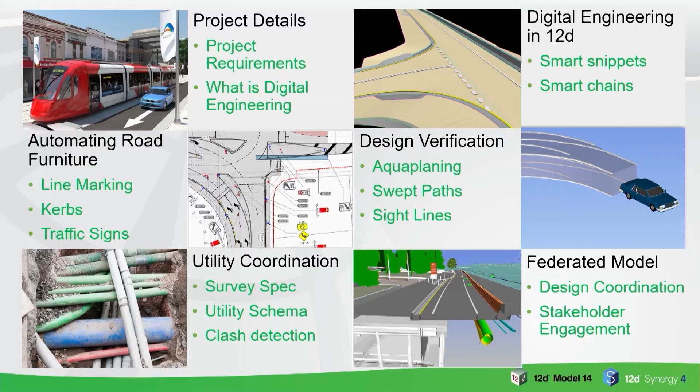He's a senior engineer from the highways team in Sydney. Today we're going to present the Parramatta Light Rail project, going over this rough content: project details, what is digital engineering, then I'll move you on to Jarred, who's going to talk about digital engineering in 12D using smart snippets and smart chains. Then automated road furniture using line marking, kerbs, and traffic signs. Then design verification: aquaplaning, swept paths, and sightlines. Then back to me, finishing with utility coordination using the survey specification, utility schema, clash detection, and finishing on federated models, design coordination, and stakeholder engagement.

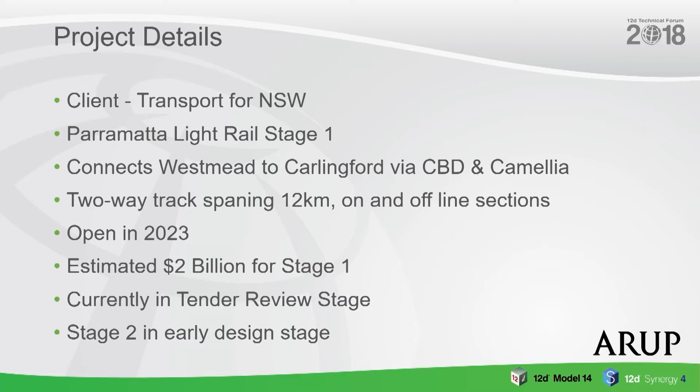First of all, the project details. The client for the project was Transport for New South Wales. The project is stage 1 of the Parramatta Light Rail, connecting Westmead to Carlingford via the Parramatta CBD and Camellia. It's a two-way track spanning roughly 12 kilometres, on and offline, through urban streets as well as offline sections. It's due to open in 2023 with an estimated cost of $2 billion for stage 1. The scheme is currently in the tender review period, so complete award in a few months' time. Stage 2 has been announced and is in the early design stages as well.

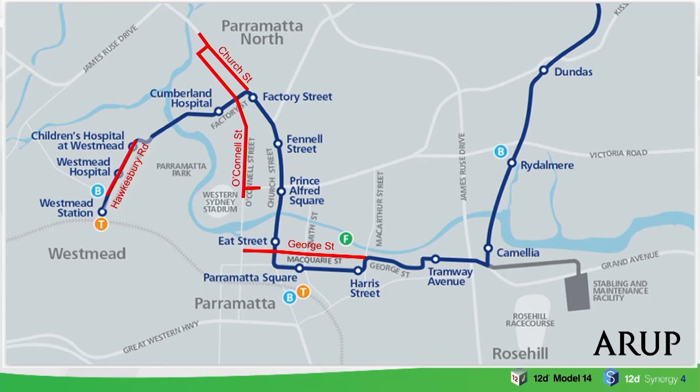In terms of the client and what they actually wanted from us, they wanted all 3 enabling works packages delivered in 16 weeks, a very, very quick turnaround. That was to enable them to get these off to a contractor to be constructed before the main works commenced. They also wanted to apply a high level of digital engineering on the project and develop a 3D model, applying work breakdown structure and naming to enable 4D, 5D and 6D BIM - that'll be asset management, I'll explain next slide - as well as use the model for design coordination and stakeholder engagement.

So what actually is digital engineering? It does seem to be a buzzword going around for the last few years, but I'll try and explain it, or what Transport defines it as. Digital engineering is simply a collaborative way of working using digital processes to enable a more productive method of planning, designing, constructing, operating, and maintaining our assets. This is achieved by creating a common data environment, a CDE, that aligns digital information systems, including CAD controls - time, cost, risk, etc. - asset data, and other related systems.

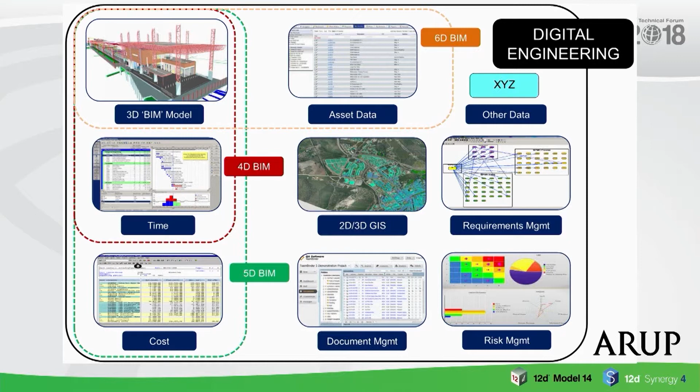This diagram shows where you have your 3D model, which then links to the 4D model, which would be like your Microsoft Project, then linking back to your cost, which would be like CostX, and then linking to your asset data at the very end of the project and handover. You also have other systems like 2D and 3D GIS, document management systems, risk management, requirements management, etc. So I'm now going to pass you on to Jarred, who's going to talk about digital engineering in 12D.

Thanks, Niall. As Niall's already discussed, one of the main constraints was the time frame that we actually had to deliver the project in. So I'm going to talk about a few of the design tools that the road design team used to, I guess, reduce the amount of rework or reduce the amount of documentation, and ideally get the design right first go.

One of the obvious things that we used was snippets, or smart snippets. So we had snippets for carriageways, barriers, kerbs, pavements, retaining walls, all those sorts of things.

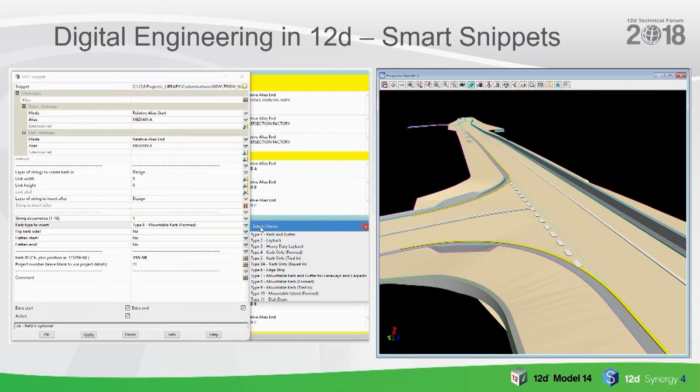The idea being is that we tried to limit the amount of manual inputs into the snippets that could result in errors. So the snippets had all the code hard-coded into the snippet, or it referenced project details or project attributes, and that way there was consistency across the project. The design models were consistent, obviously meant the output models were consistent, and there were obvious benefits from that.

In addition to the design elements, we also had other snippets that were doing things like the vertical clearance envelopes. You probably saw an example of that yesterday. We had our own version of it. We also had things like modelling the clear zones within 12D.

That obviously meant that we could design barriers on the fly. We didn't need to do any sort of review process afterwards. Other disciplines were also using those outputs. So the clear zone outputs went straight to the landscaping team, so they knew instantly where they could and couldn't plant different species of trees, or whether it had to be trees or shrubs or differences like that.

Also the snippets, in the background, were embedding attributes into all the trimeshes and things like that were being created. So when we sent IFC models out to other packages, like building structures or civil structures, they could interpret our design straight away. They didn't need to be asking us questions or anything like that. They knew exactly what they were looking at. Obviously it just sped up design time, sped up the coordination between disciplines.

Another obvious one is smart chains. So again, we had one source or one chain that would effectively run multiple times, taking advantage of the parameter files. This meant that we could obviously make tweaks to outputs easily and then get consistent outputs across disciplines or across packages, that sort of thing.

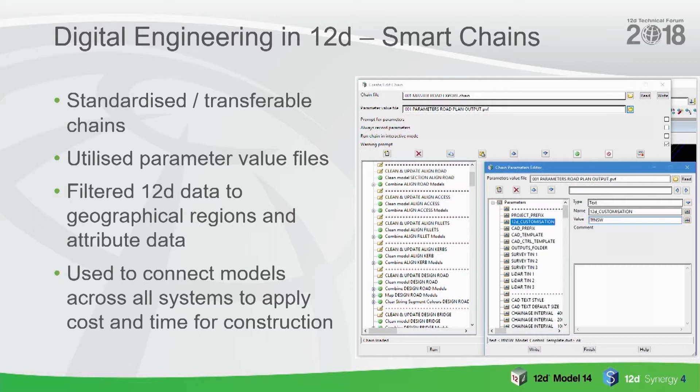One of the things we found is that we always spent a lot of time at the back end of projects doing the documentation, the sort of things that get shoved into the back of reports and don't really ever get looked at but need to be there. We wanted to do all that sort of stuff on the fly, so that we didn't have that period at the end of the project where we had to go back and do all the checks. So we had a whole bunch of macros that helped us with that sort of thing.

One of the main macros that we were using was this dynamic signage macro. The way that it worked was there was a spreadsheet database which was populated right at the start with a few manual inputs, basic things like a control line name, a chainage, an offset, a sign type, that sort of thing.

Within 12D, the macro read this spreadsheet and pre-populated the rest of the values, like sign sizes, pole heights, footing depths, all that sort of thing.

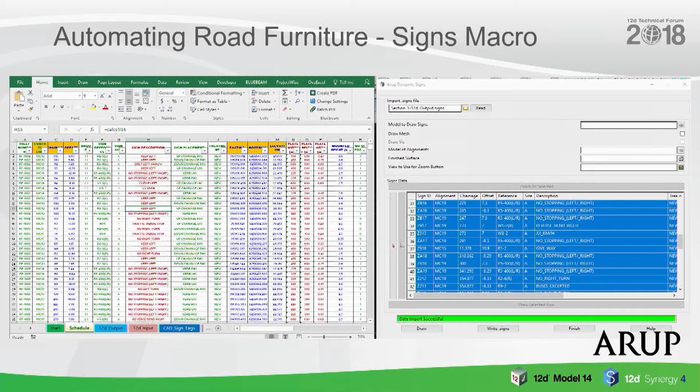The macro, once it read all that stuff in, it then went and created a whole bunch of stuff in 12D. It created the true size trimesh of the sign, so you knew the physical extents of it within 12D instantly. It created a 2D scalable block, 2D scalable labels, all that sort of thing. That went back out of 12D, and there was no manual CAD work needed to label the signs or present it. It was already done via the macro.

Obviously this sped up scheduling, sped up time, all that sort of stuff. The other benefit of the macro is it went two ways. So once you had that 3D true scale block within 12D, you could go and move it or update the register within 12D, and then 12D would overwrite the spreadsheet back again. So you could do both the design within 12D and outside of 12D. Very handy.

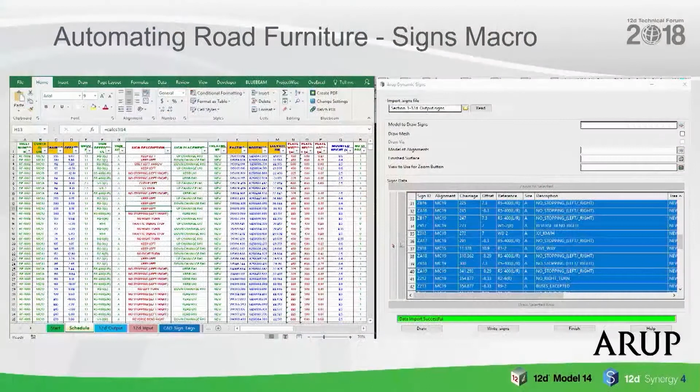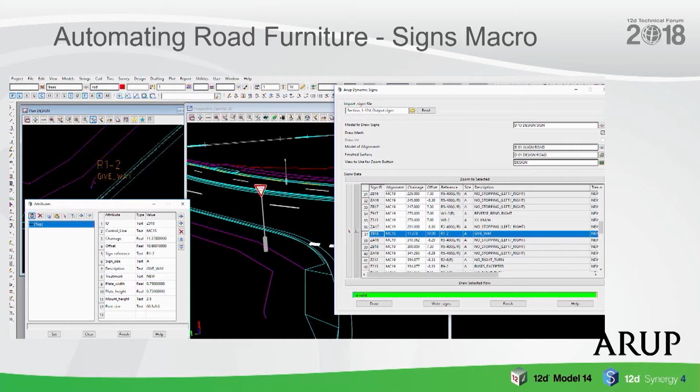Here's just a couple of different screenshots of it showing the spreadsheet there within 12D. The macro also created a whole bunch of attributes again, so if the trimeshes went back out of 12D, you could instantly see what the trimesh was about. Just another good visualization or screenshot there of how it all looked once it all came together.

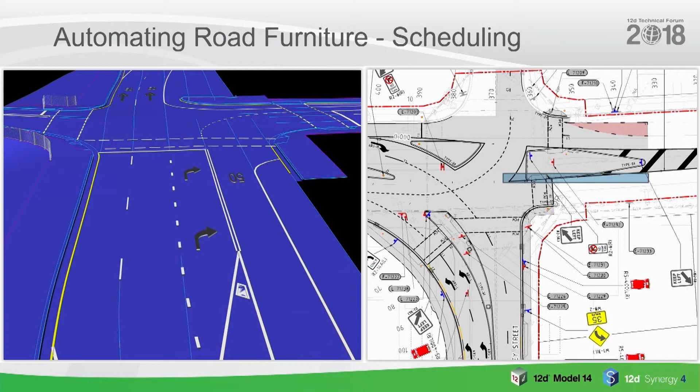Another thing our snippets were doing was trying to automate scheduling. We particularly used that for road furniture items, things like line marking, delineation, arrows, symbols, signage, curbs, barriers, all that sort of stuff. The snippets in the background applied all these attributes and data to what was being created, in addition to just the design strings or design links, so we could automate scheduling. If the design changed, schedules happened automatically, with no need for someone to sit down and add up all the lengths or quantify things themselves. We could easily add all the annotation within 12D.

Another thing, we're trying to speed up and do all the conformance checks and conformance documentation on the fly rather than leaving it to the end.

We made a tweak to the aquaplaning macro, which, rather than manually drawing the flow path, draws it dynamically as to where your cursor is located over the screen. As you move your cursor along, it automatically moves the flow path with it. When you find one you're happy with, you click OK and accept it, and the macro automatically applies attributes onto that string showing all your aquaplaning risk data. It doesn't have to leave 12D to review it - you can do it on the fly, and if it's wrong, make changes to your design straight away.

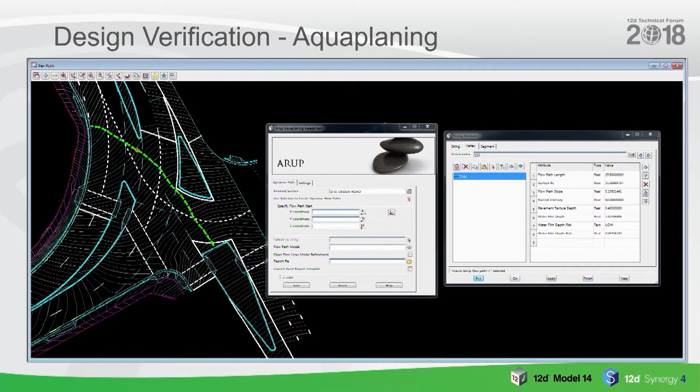We're also trying to move into the 3D world with IFCs and trimeshes, so it automatically made a 3D version of the flow path as well, so you can send that out to other packages and they can instantly see where all the critical areas are that we've been looking at.

Again, to reduce documentation, that macro, as soon as you accept a line and click OK, automatically does a PDF plot for you, so you can tuck that away neatly in the back of your report without spending any more time on it.

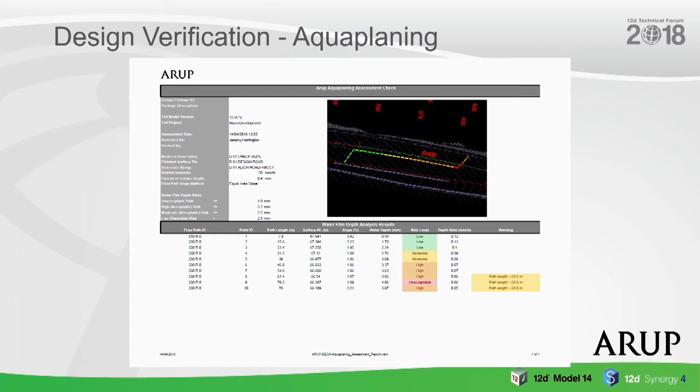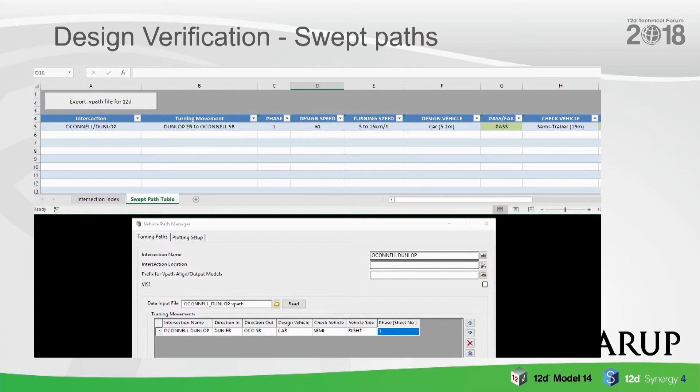Another thing we found we spent a lot of time on was swept paths. Another macro was developed, sourcing from an external spreadsheet. Someone would go through and populate all the intersection names and design parameters, and then with a two-step phase with the macros, it'd read that spreadsheet in. It would then go and create all your super alignment, turn path functions, and all that sort of stuff within 12D with very little need for edits or tweaks, because all the base data is already filled out in that register that you know you're going to have to check before you even do the checks.

That macro then instantly does a plot, so you can tuck it away in the back of the spreadsheet. It also creates a 3D visualization, or 3D trimesh, of the turn path itself.

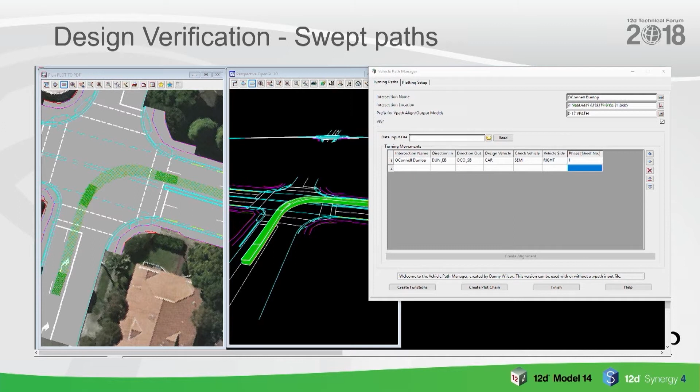One of the main concerns the client had was being in a constrained CBD environment. A lot of the surrounding buildings had awnings spreading over or occupying most of the footways, so one of the main concerns was whether heavy vehicles using curbside lanes would actually clash with the awnings. It was handy to have these visual checks of the turn paths to show on the fly within 12D that there wasn't an issue at all.

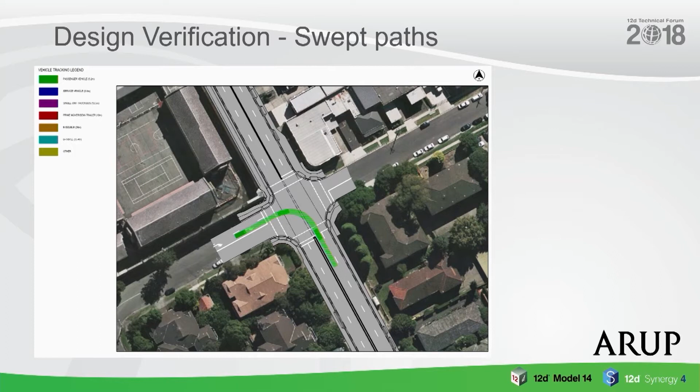We didn't need to produce any more documentation on it. That's just an example of one of the plots that came straight out of 12D, showing the turn path without any manual input at all, rather than filling out that register at the start. Just another handy view shot of what the actual 3D envelopes looked like.

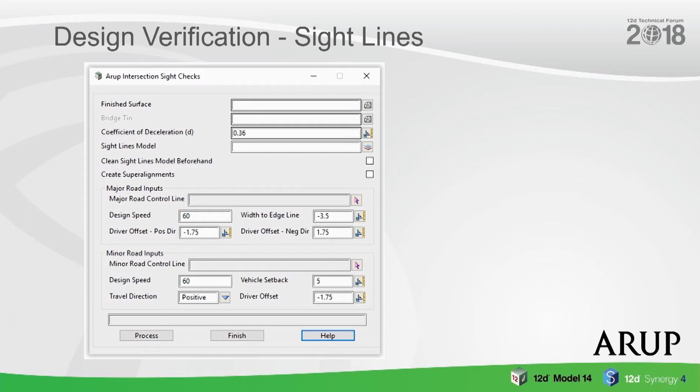Another example is all the sightline checks. We had a macro that would go through - you'd put in all your parameters as to what sort of intersection sightlines you actually needed to check. It would create a computated super alignment for you and instantly work out if it fails based on intersections with tins or intersections with obstruction models such as trimeshes or that sort of thing.

To create some of those obstruction models, we had a macro which would map your 3D survey model to actual 3D objects - all your point strings, things like trees, poles, other elements such as road furniture like bus stops and bins, anything generally picked up as a point string from your survey model. The macro would map that to an actual 3D trimesh object in 12D, so you could easily put that into your sightlines and work out if it's actually an issue or not.

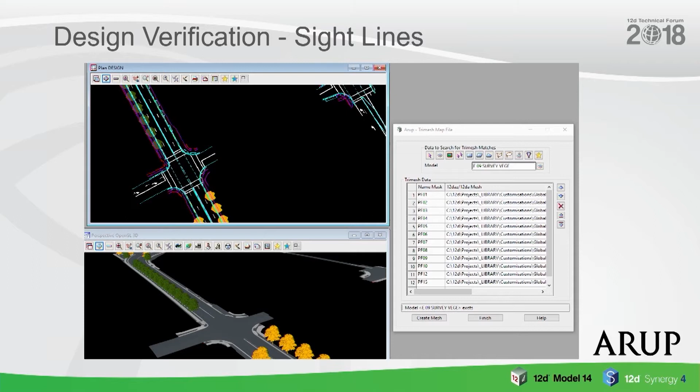The macro would also create a perspective view for you, starting at your eye position and then your object position. So we could visually show the client on screen whether or not it was an issue, with the added benefit of reducing documentation at the end of the project.

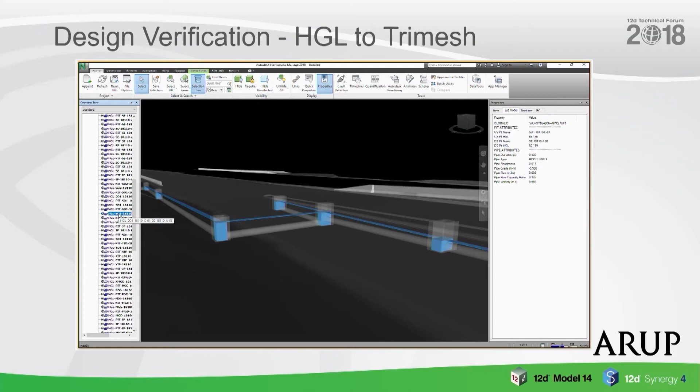Another one that we found really handy that we developed in-house was the HGL to Trimesh. Taking the network that's been modelled for the drainage editor, it'd go and show the water levels in the pits, in the pipes, all that sort of thing. It's a Trimesh, so you can turn it on in sections, in perspective view, and get a pretty good idea straight away as to whether or not there's going to be design issues.

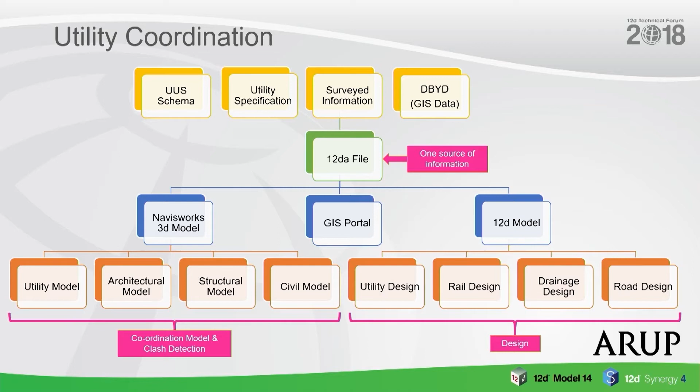Then for the Navisworks model, we could look at the utility model, the architectural model, the structures and civil model, as well as in the design space we looked at the utilities, the rail, the drainage and the road. All this information was coming from one source, one point of truth, as you will. That would be the 12D file, and all the design would be in the 12D, while all the coordination and clash detection we were doing in the Navisworks model.

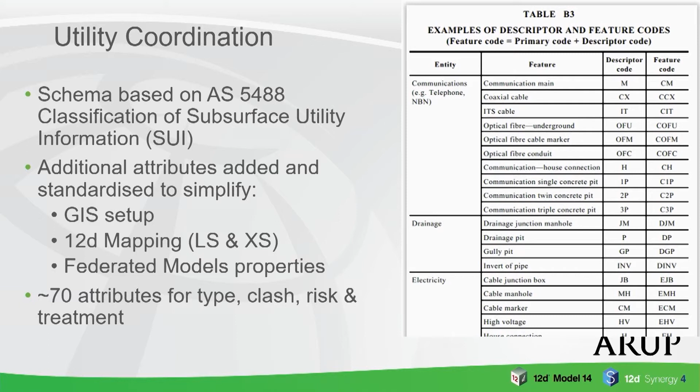The utility schema was largely based at the start on the Australian standard 5488, which was a classification of subsurface utilities - that's just an extract you can see there in the table on the right hand side. From that, we added additional attributes to standardize the setup of the GIS system, the 12D mapping, your long cross sections, as well as the federated model properties. Every utility had roughly around 70 different attributes for type, clash, and we also added in the risk and the treatment going forward - whether it would be concrete protection, removed, abandoned, whatever it was.

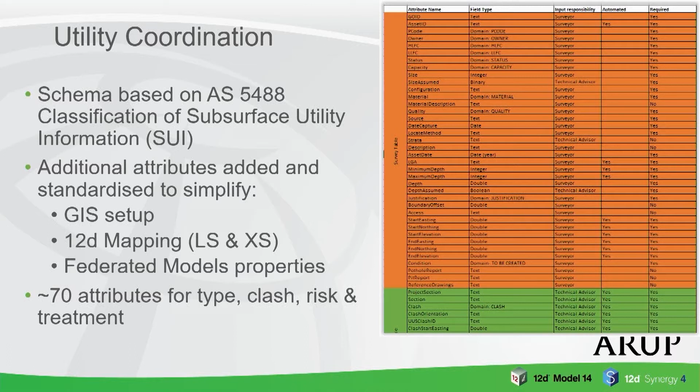So the utility schema basically looked like this here. As I said, this is just a snapshot, but there are around 70 different attributes on these from various different areas. The workflow we went through for this was, first of all, we went through and digitized the dial before you dig data in 12D.

A bit of a pain process, but we tried to get a lot of this from GIS and convert it across just to reduce the actual manual input. We then went and identified any additional survey needed and sent that out for additional survey and potholing, which the surveyors came back with. We asked them to provide a 12DA file with the attributes already applied.

We also applied a unique ID, which we called the GOID, using a macro. The macro picked the model and assigned an individual identifier to each string or each point, and we had another macro set up where you could jump to that unique ID as well, just for ease of checking the data.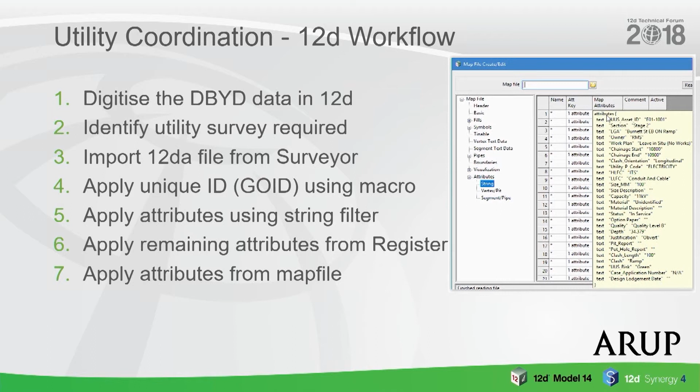We also applied the actual size of the pits and pipes using the attribute string and the size from there. Before we reapplied the register - it's a back and forward process - we ran the attribute manipulator file just to clean out the data rather than doubling up on the attribute strings themselves. That's the pipe size one in there.

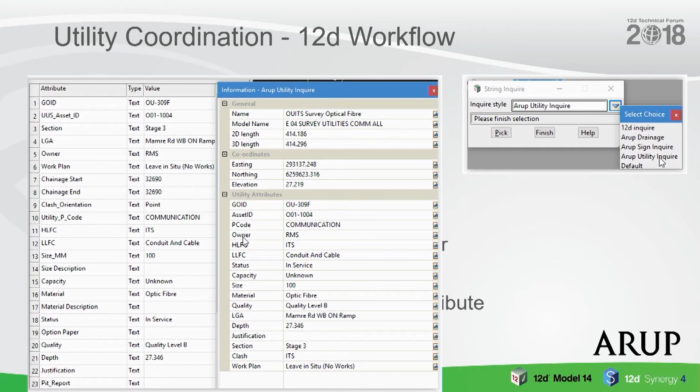We also built up what we called an Arup Utility Inquire. You've probably seen some of this yesterday, where we had a customized tool for all the attributes we set up. Whenever we selected a string, you didn't have to go into the long properties attributes - you could just see all the information there. Again, all this was automated in a standardized chain, and once it was all done, it was exported to IFC, GIS, and the federated models.

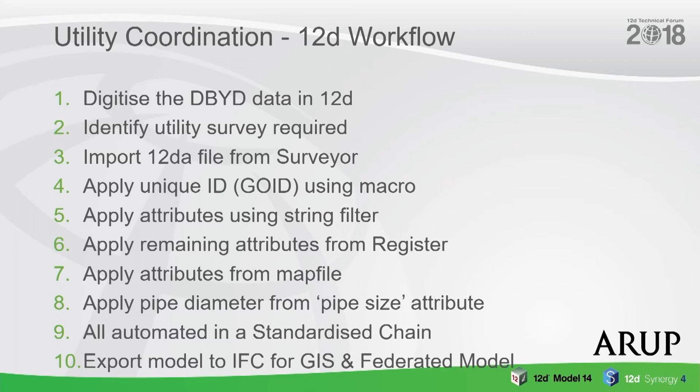Here's a snapshot of the information within the 12D model. When you select a string, you can see the properties on it in both plan and long section, and you can see the actual pipe size. Taking that forward, we see the exact same information in the GIS portal and in Navisworks. That was the power of using 12D this way - we had the same information across all platforms.

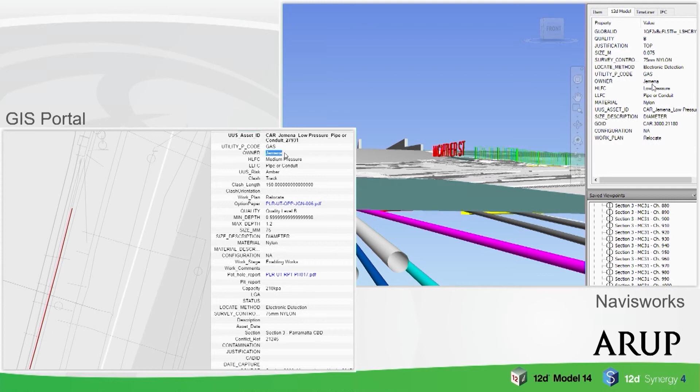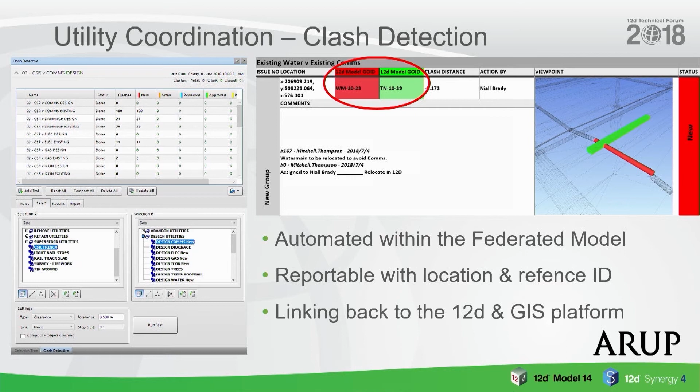Within there, we're also able to do some clash detection. We basically sorted out if it was a hard clash or a soft clash using standardized rules, and then we could report back on the actual clash. You can see where we got the 12D GOID in the clash report, so we can go back and check that within the model and the GIS platform.

Ultimately our deliverable was to deliver a full set of paper drawings, or PDF drawings even. Here's an example of our long and cross section - we have basically the utility type, the quality level, and the estimated invert level on both plan and cross. But when we're providing this information to contractors, it's very important to caveat it, so we said the contractor had to confirm all the information, and the utility model we provided was for information only.

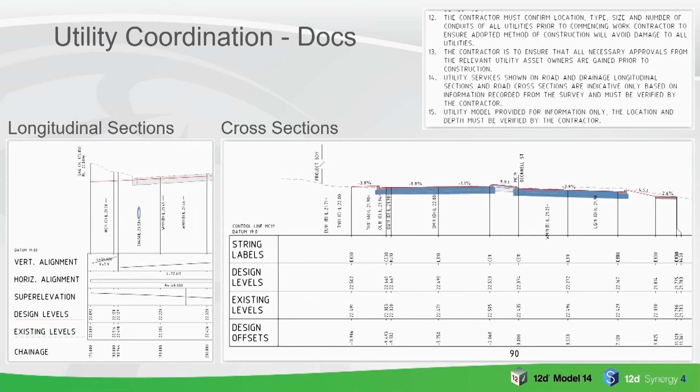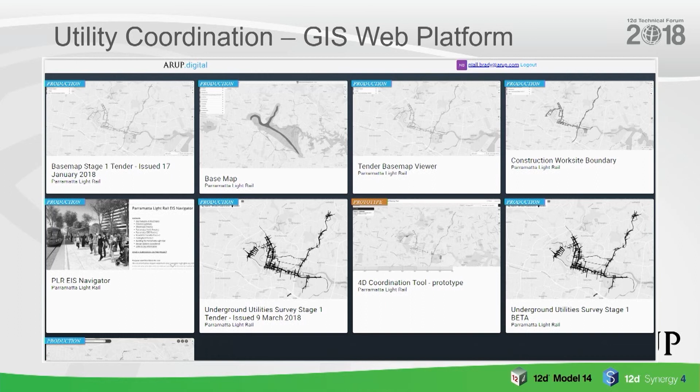Here's an example of our GIS platform. This was actually an online platform, so you didn't need any software - you could just go on, click on the utility portal, review the utilities there, and report it back for the designers to amend or tweak treatments and things like that. We gave access to the contractor, and even some of the authorities wanted access to this as well. So a very good message.

Just the last topic today - how we basically federated all these different file types together. This was one of the sections on Hawkesbury Road, where we had a number of different consultancies as well as disciplines. We had road design by others, drainage by others, the utilities I just spoke about, a civil structural package that came from Revit, as well as the building, the architect, and landscape architect as well.

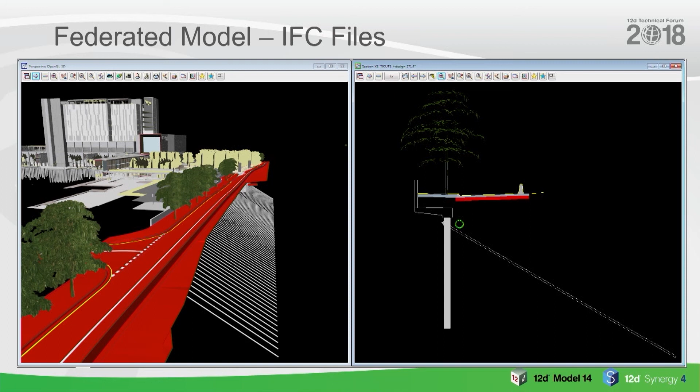So we were able to bring them all together in 12D, do our review and our design, and basically make it all fit together. You can see there, that's a section along the road - you can see massive rock bolts, our landscaping, and the 12D design on the road as well. This is again from 12D itself, just a few more snapshots of the model.

Then we export all our files as an IFC file out to Navisworks. You can see some of the sheer utilities along the corridor, and what Jarred spoke about with the traffic signs macro. We were able to put in the foundations of all the posts as well, and you can see some of the clashes there - some of those things were removed afterwards. Then you see landscaping, all our pavement fully modelled, as well as cutting sections through the structure.

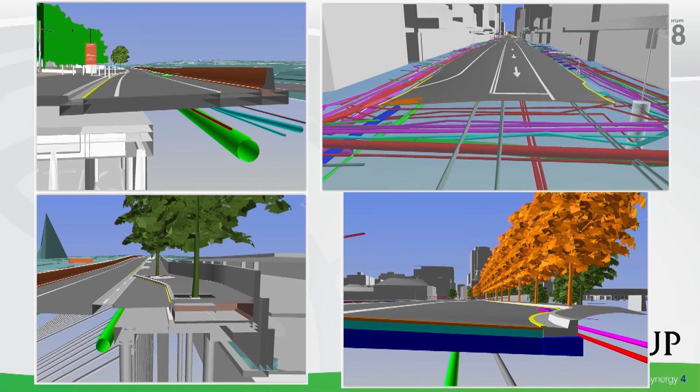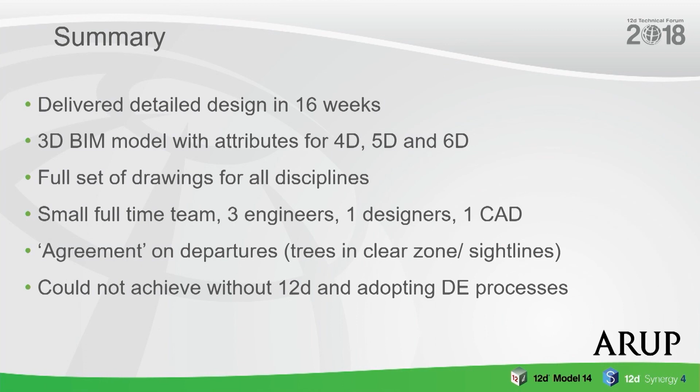So to finish up - yes, we actually delivered this entire project in the agreed deadline of 16 weeks. We delivered the 3D model with attributes for 4, 5, and 6D. We had a full set of drawings for all disciplines, and this was done with a relatively small team of 3 engineers, 1 designer, and 1 CAD person at the end.

By using the model in our stakeholder engagement and speaking to our client RMS and Transport, we actually agreed loosely, not 100% just yet, on some of the departures, like the classic one where Jarred was showing the sight line for the trees, where you can clearly see the tree is within the sight line, but they wanted to create this boulevard effect, so we could see what you could actually see by placing the cars on the road itself.

Overall, we could not achieve this without adopting 12D and digital engineering processes.